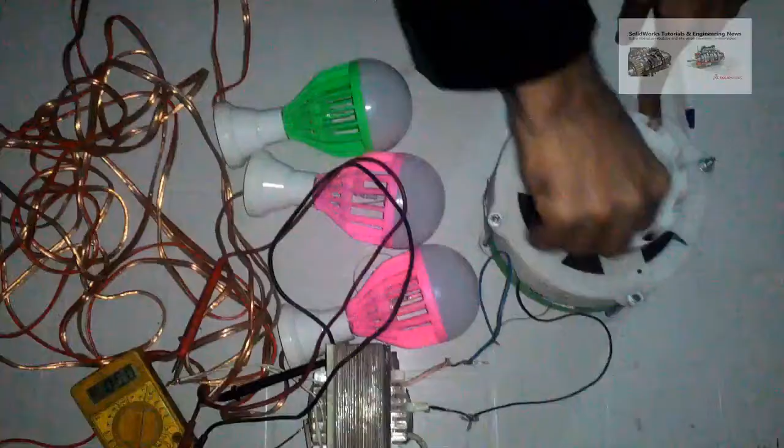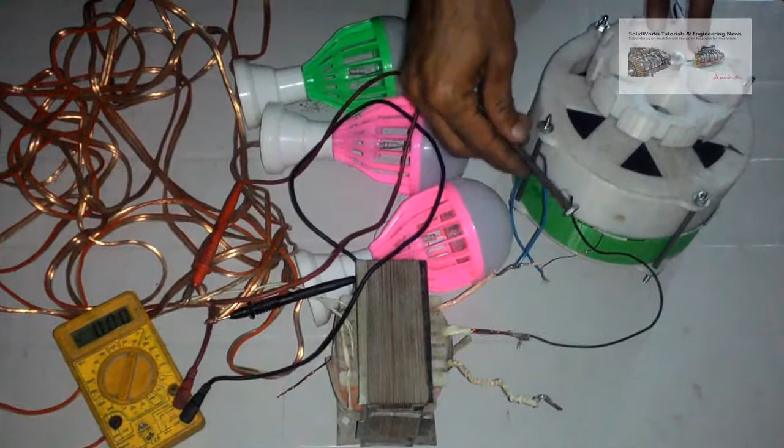In this video, I am going to tell you how to make 3D printed single and multi-stage permanent magnet AC alternator. I will tell you each and everything about this, like number of poles, number of turns, and the shape and size of magnets. I will also share the SolidWorks and STL files that you need to 3D print this alternator.

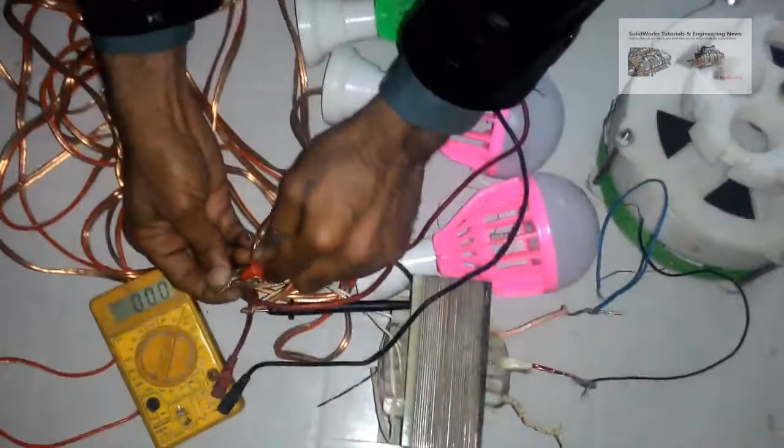Let's start. The alternator in front of you is single stage alternator and it has very low output voltage. To get more voltages, I had used this step up transformer, and at very low RPM you can see it is generating 12 volts. The lights are DC LED bulbs and the alternator is producing AC volts. So that is why the bulbs are flickering at the moment. You can use bridge rectifier to convert AC voltage into DC to overcome this problem.

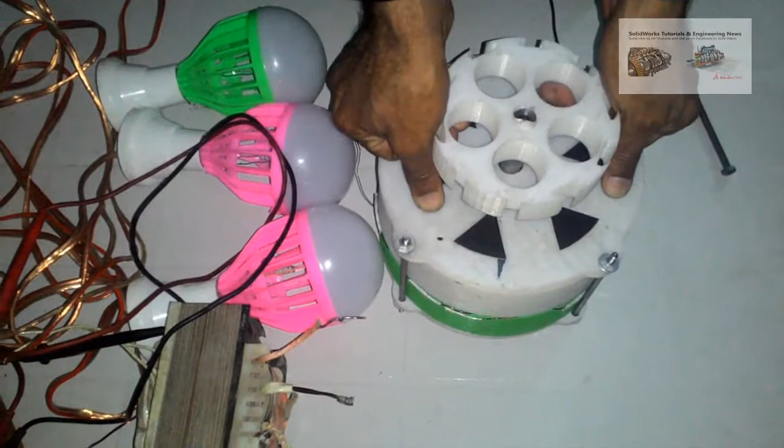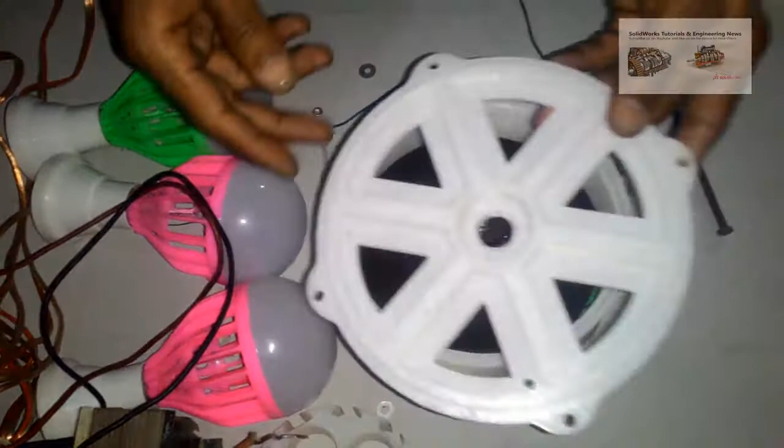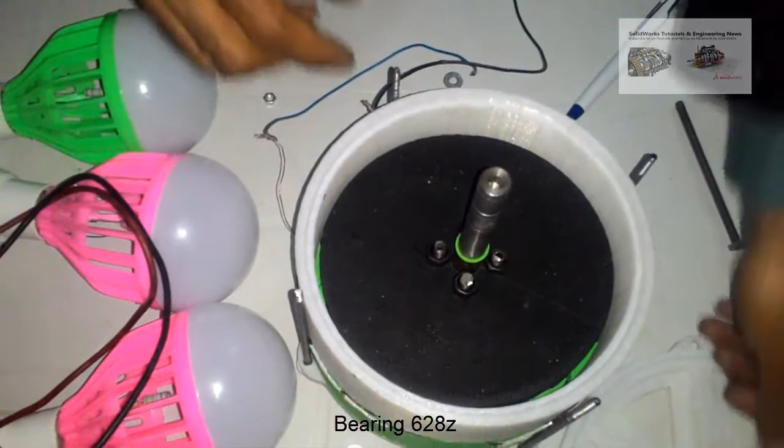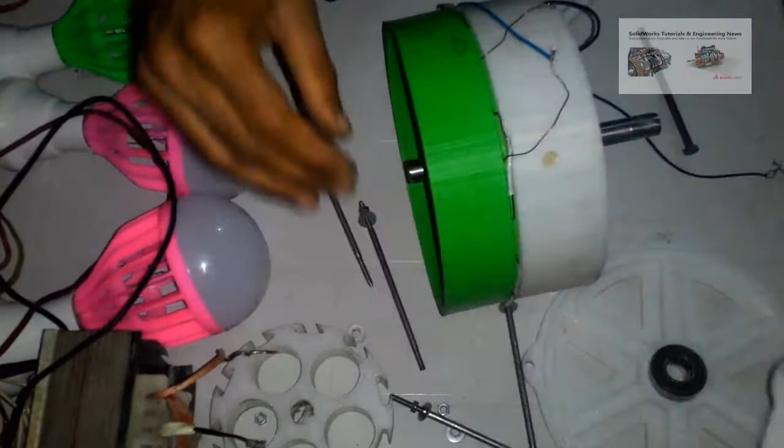Let's disassemble this single stage alternator to talk about its characteristics, and then we will talk about the multi-stage alternator. So let's start. Unscrew these bolts and disassemble it. So this is the side cover, and it also has the bearing slot here. Here is the bearing and the bearing number is 628Z. This is the other side cover with bearing, same bearing 628Z. Both side covers are identical.

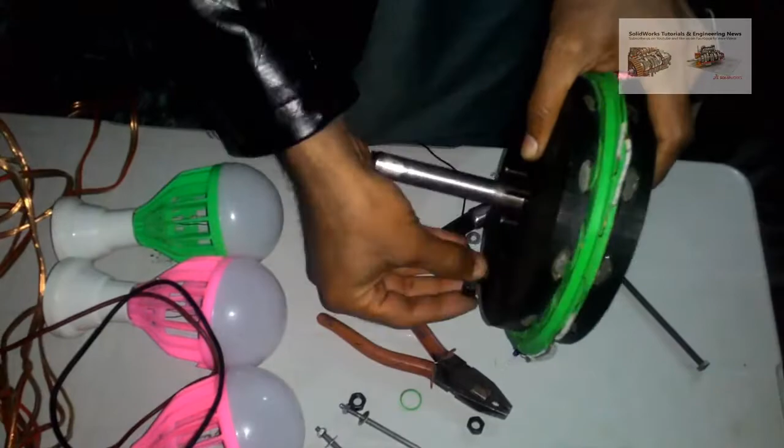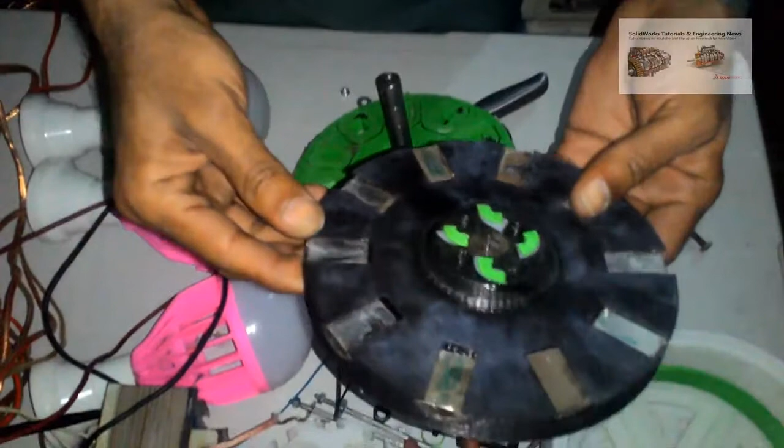This is the outer ring and both green and white outer rings are identical. This green disc is stator and it has copper coils inside it. And these two black discs are rotors and they are mounted on the same shaft. They are also identical and they carry magnets in them. This is the magnet disc or rotor. The magnets are N38 and the total number of magnets are 10.

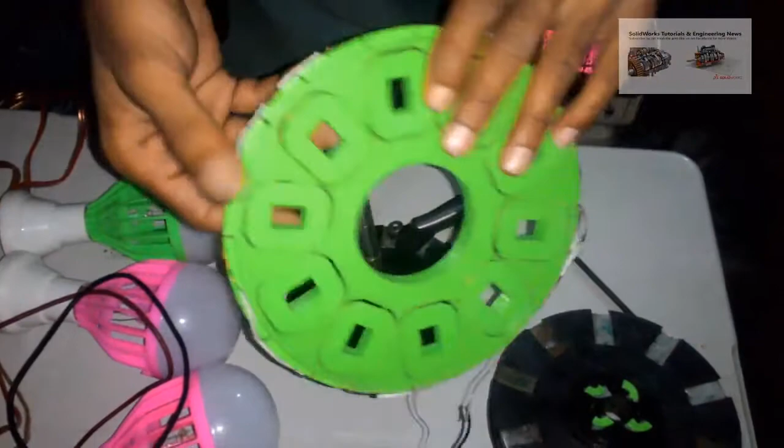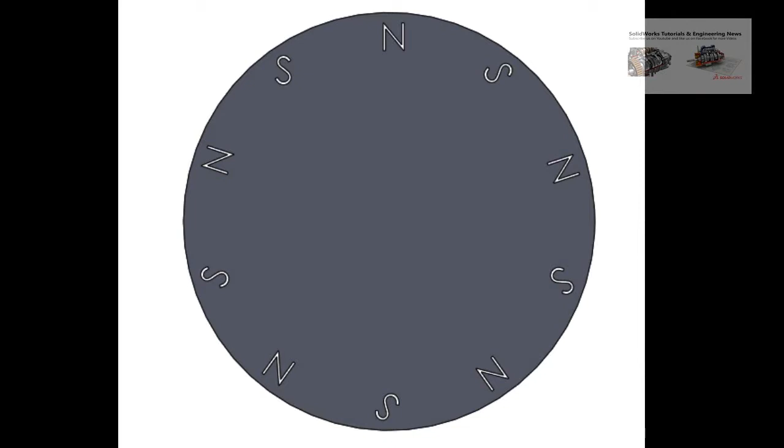This is the stator and it has 10 copper coils inside it. The wire size is SWG23 and number of turns are 80. 10 magnets have been used in one rotor, so total number of magnets are 20. All 10 coils are connected in stator via end-to-end and start-to-start connections. This is the magnet arrangement on the rotor. So the magnets are arranged in opposite polarity next to each other.

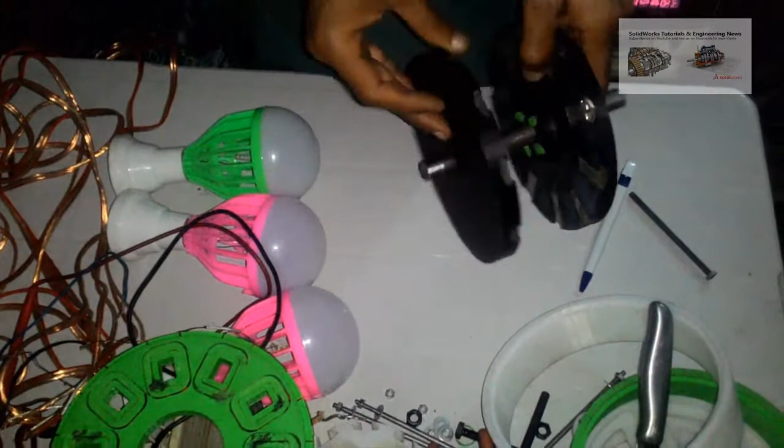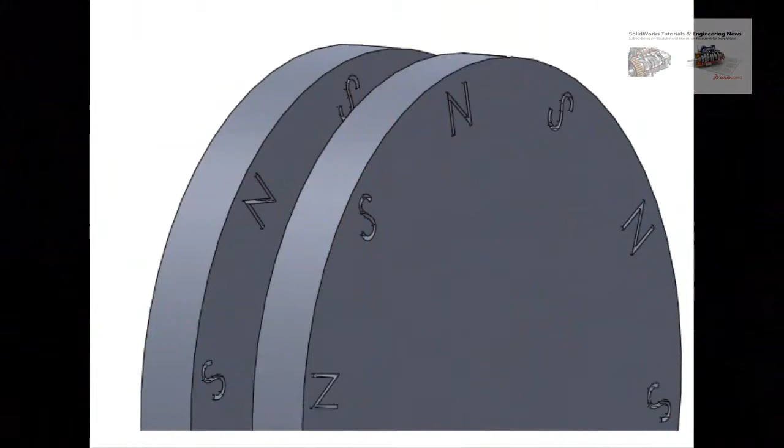Both of these magnet rotors are assembled on the same shaft in such a way that they attract each other, like this. If they repel each other, then they will not produce electricity. You can see the diagram here. This is the casing on which the copper wire will be wound, and this is the stator in which the copper coil has been fitted.

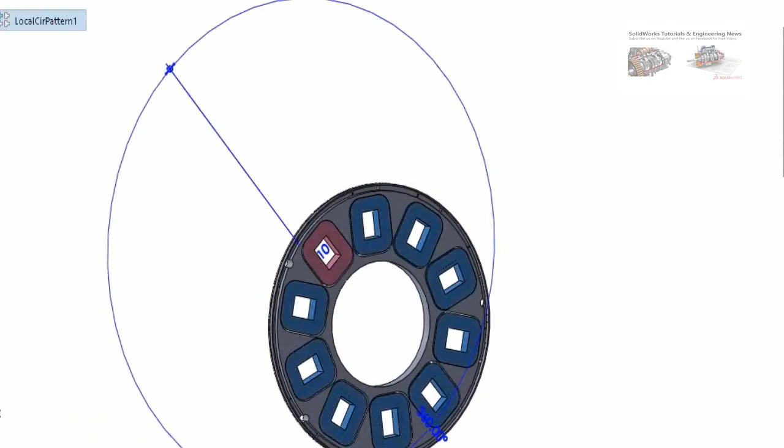So as I told you before, total number of coils are 10 and they are connected via start to start and end to end connections. You can see there are two holes from where you have to withdraw copper wires or output wires from each coil. So this was the single stage alternator.

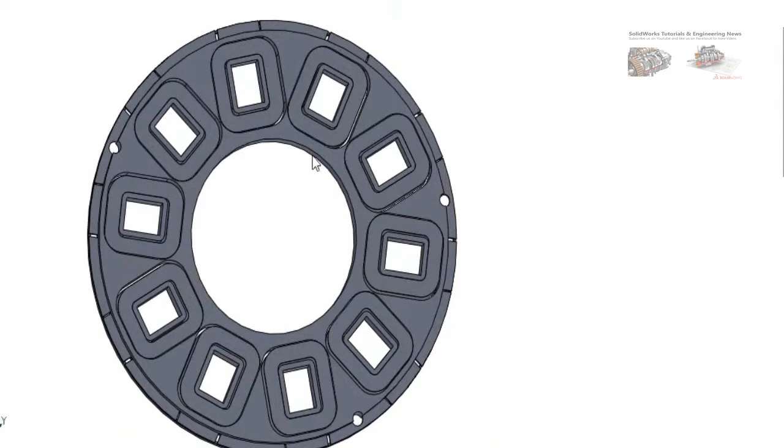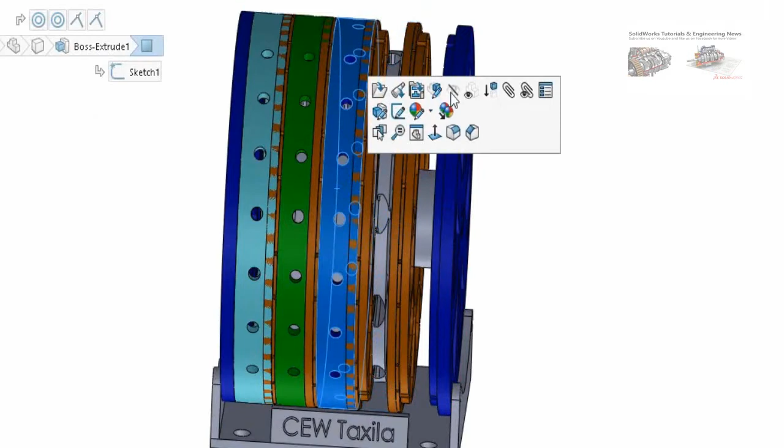Now let's move toward multi-stage alternator. This is the multi-stage permanent magnet AC alternator. It is quite similar to single stage alternator. At the moment I am hiding the outer rings. The discs with brown color are the stators of this alternator, and the discs with grey color are rotors of this alternator. Here you can see these are the rotors with grey color.

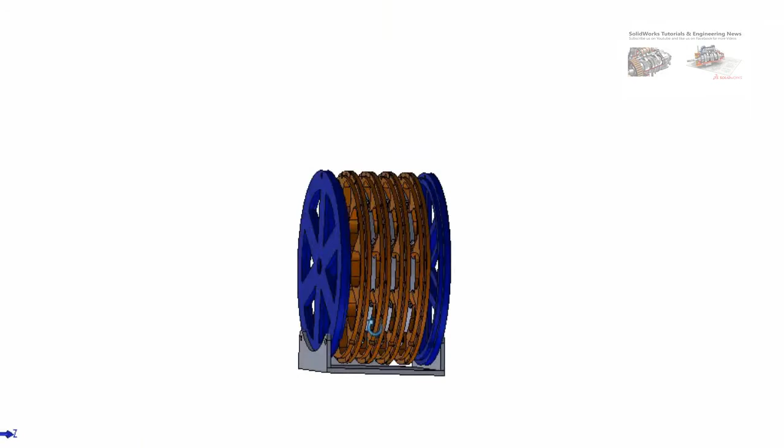So here is the side cover, and it has the same bearing 628Z. There are two side covers used in this alternator. There are 10 coils in each stator, and the total number of stators are 4, while each coil has 410 turns. Magnets are N38, and there are 10 magnets in each rotor disc. Copper wire size is SWG29. Connections are the same as single stage alternator, end to end and start to start connections, while all the four stators are connected in series to each other.

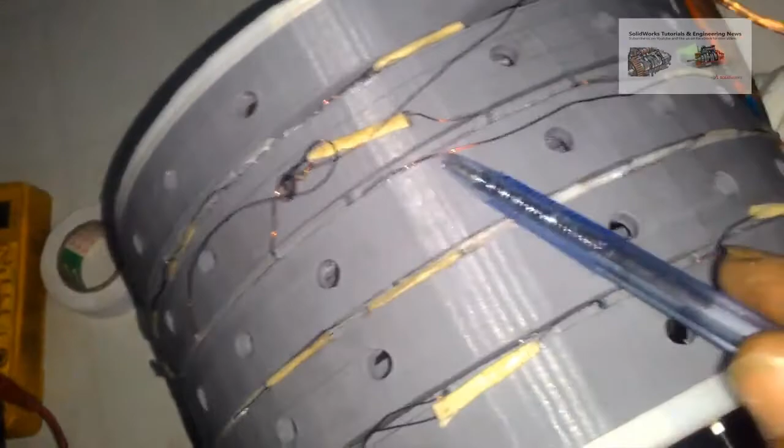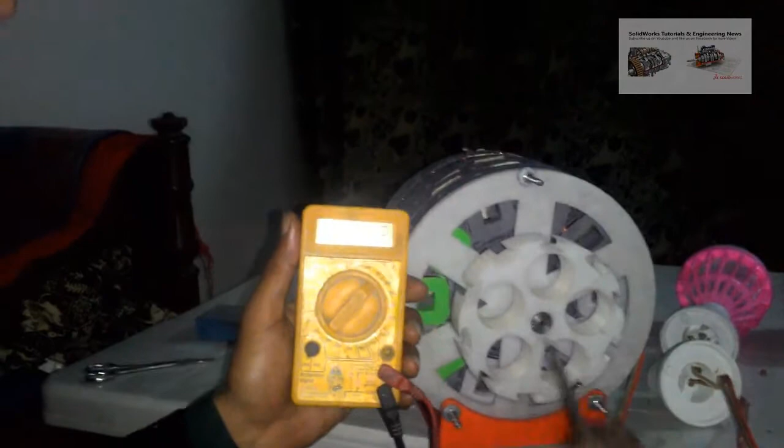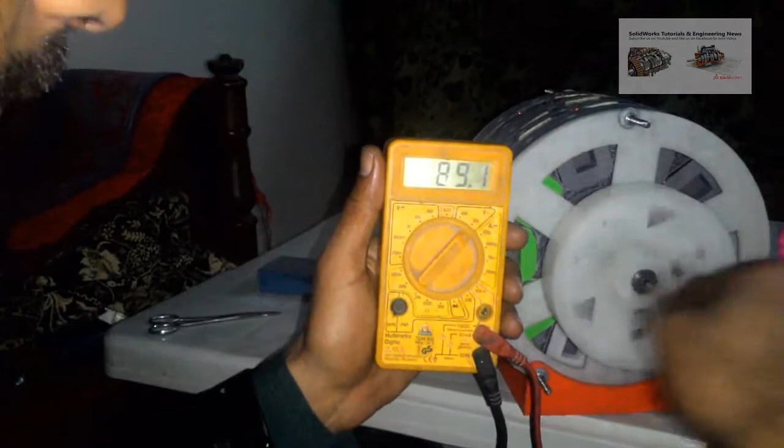Now let me show you its working. So as you can see, I'm rotating it with my hands, and it will produce maximum voltage of 110. Now here you can see I had connected three 12-volt DC lights with it, and you can see these lights are glowing at a very low speed.